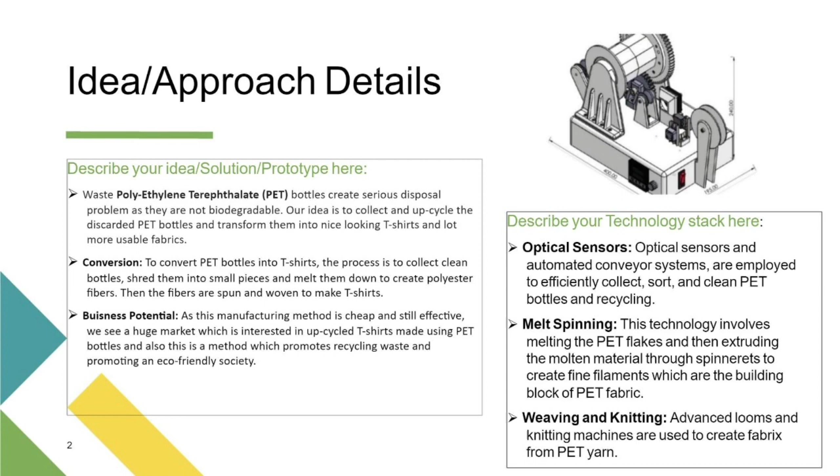So you see, the apparel made out of PET is eco-friendly, which is a testament to sustainable fashion. The apparel greatly suits athletic persons or sportswear, as it possesses a property called moisture wicking, which is nothing but transporting the moisture from the skin to the topmost layer, which is the third layer of the cloth, and then the moisture evaporates from there to the atmosphere.

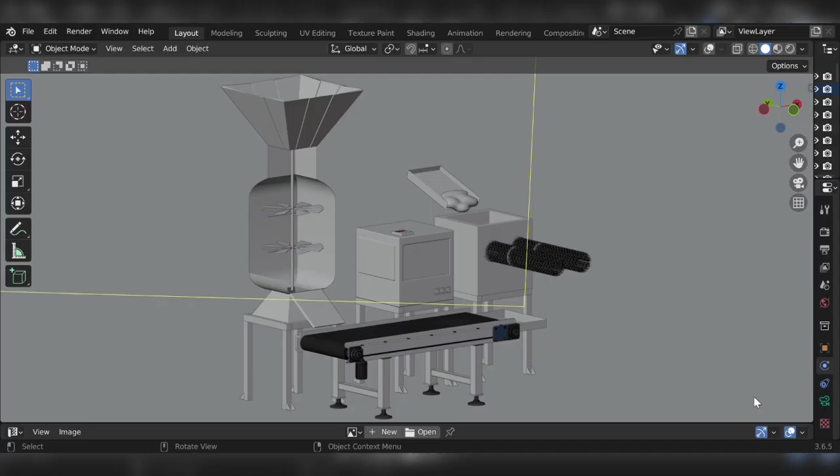Coming to the 3D model, the 3D model we have made using Blender. So you can see we have three different machines involved here. So this is the first one. The first one is the shredder machine. This is not like a default shredder we have in those industries. This is a totally different one.

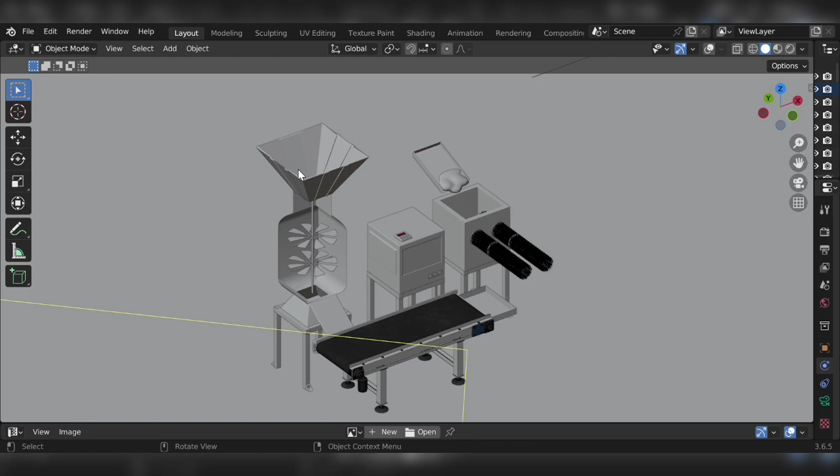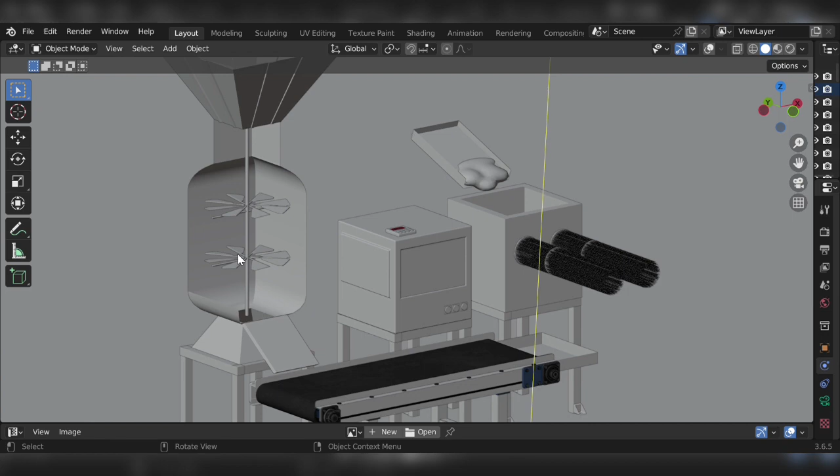So we have to load the pre-crushed water bottles through this loader, and they come down to the blade spot. So here we have multiple layers of blades. We have just given 2 blades just for an example, but we'll have 4 to 5 layers of blades rotating at almost 1000 to 1500 RPM. These blades are inclined at an angle of 35 to 45 degrees to make the best cuts to shred those water bottles into finer pieces.

Shredded pieces fall upon the conveyor and they come to the metal tray. From this metal tray we'll be loading into the preheated oven. So this is the preheated oven, which will be preheated at 250 degrees Celsius. That is the point at which plastic starts to melt. So once the plastic pieces are in molten form, we'll be loading the molten PET into the spinneret machine.

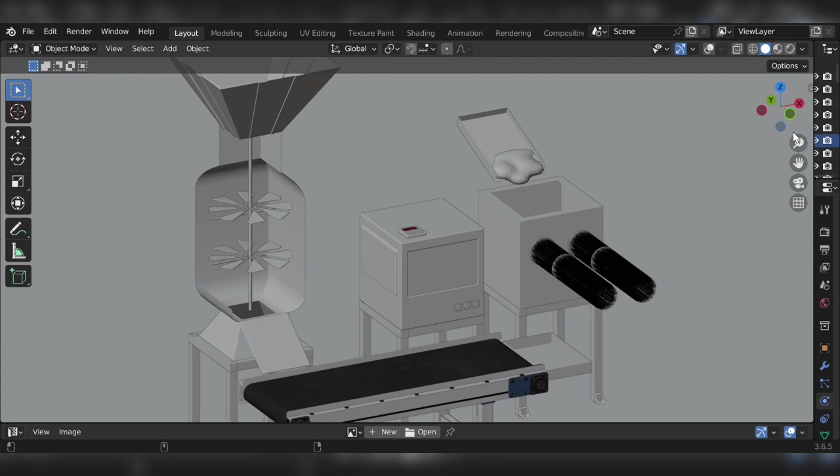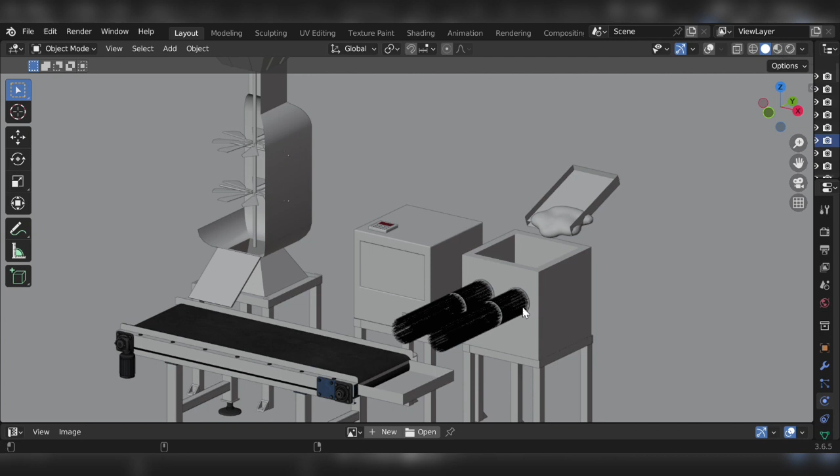So the spinneret machine contains a small device called a spinneret. The role of the spinneret is to convert the molten plastic into very small fibers with diameters of almost 0.1 millimeters. Such small fibers are obtained at the end of this process. Next, multiple fibers are combined to obtain a thread.

So then the thread, with the help of a loom, is manufactured into a t-shirt, fabric, and more based upon the needs. So thank you. This is our model.